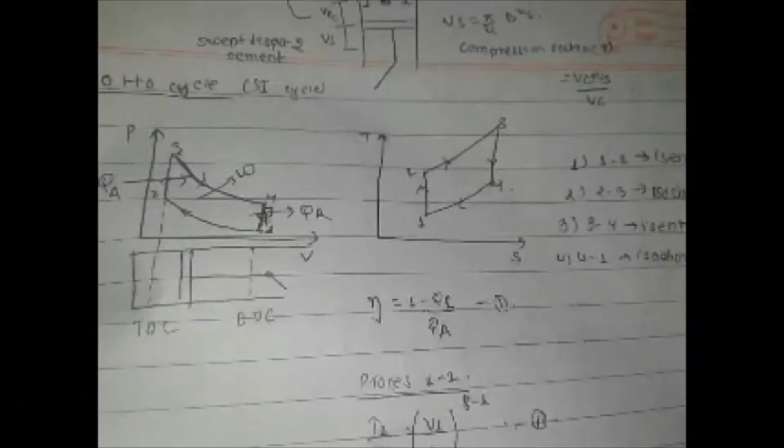And this time I have got Otto cycle for you, and good time to you all.

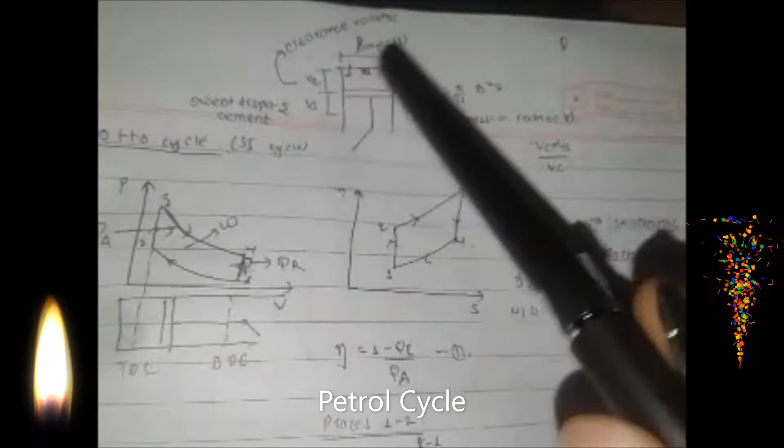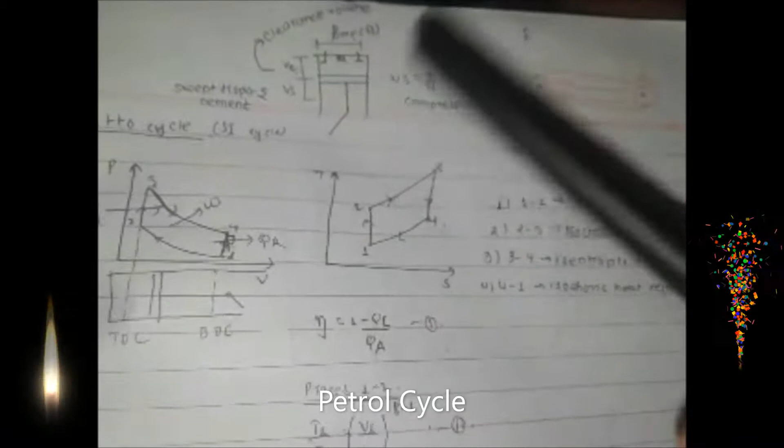Before starting Otto cycle, I will have some revision for you with this piston cylinder arrangement: what is clearance volume, what is swept volume. You have to know this swept displacement, what is compression ratio, and what is clearance, what are all these. And we know this is a piston, and this is a cylinder, and this is bore. Bore means the length, the cross section.

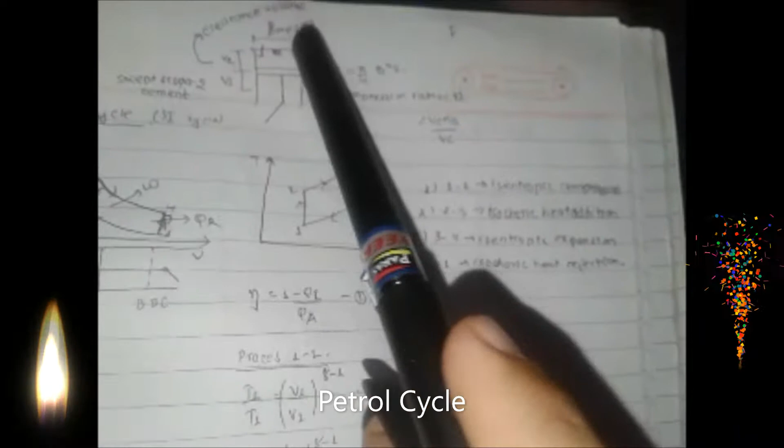Why is the bore length given, or what is bore? Bore is the radial distance of the cylinder. I don't mean it is the radial distance; it is double the radial distance, that is from one end to another end. Then why is bore length given? Bore length is given to find the cross section area of this piston.

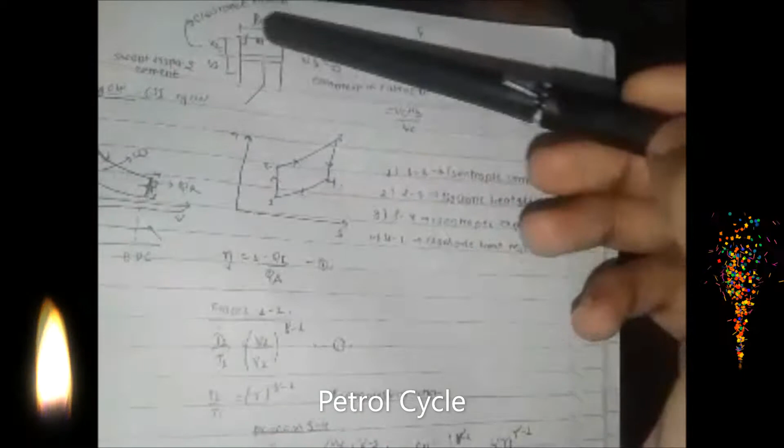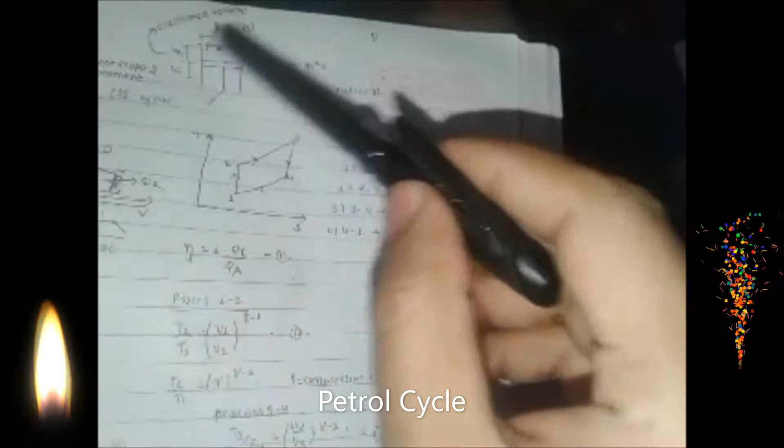And why is clearance volume given? Clearance volume is the volume which is not occupied by the piston. In the cylinder some space is left, and it is for a reason, so that the piston wouldn't hit and destroy the engine. So the clearance volume is set up, and this is clearance volume.

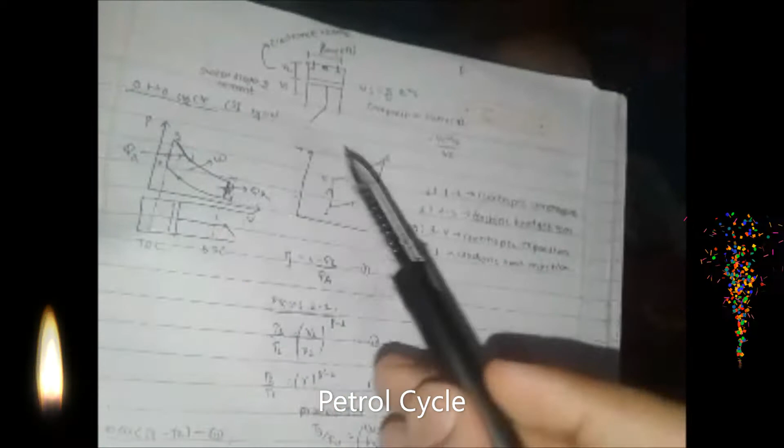Swept volume means the whole process which takes place in the swept region. From here to here is our clearance volume. Let me point it out. From here to here it is our clearance volume, and from here to here it is our swept volume. Our work done is only from the swept volume. I hope you are not confused about this.

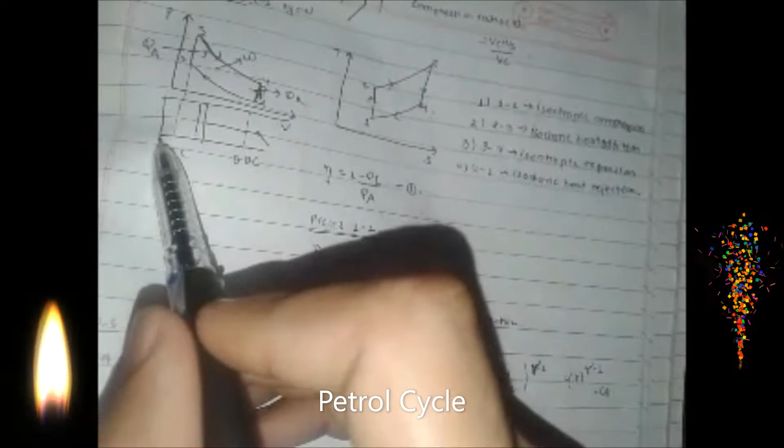And what is compression ratio? Compression ratio is the ratio of volume 1 to 2 or 4 to 3, the ratio of the volume at the end of the expansion stroke to the volume at the start of the expansion stroke. Since the volumes of state 1 and state 4 are equal, and 2 and 3 are equal, we can also say V1/V2 = V4/V3 = compression ratio.

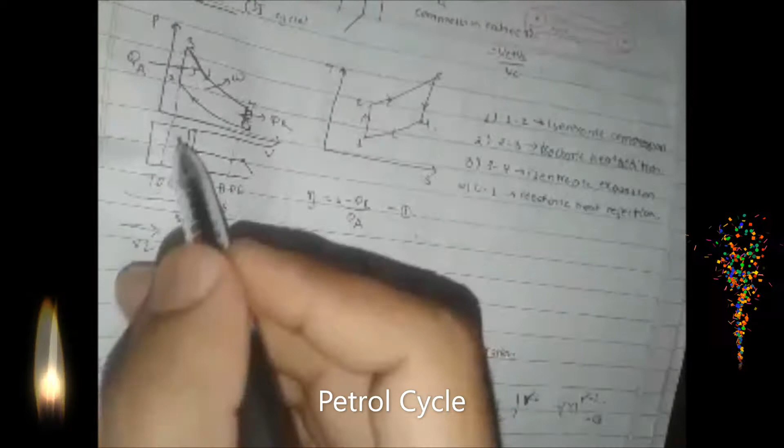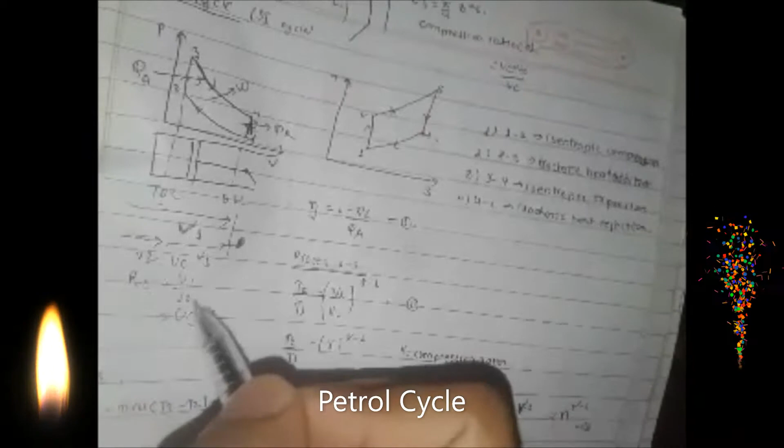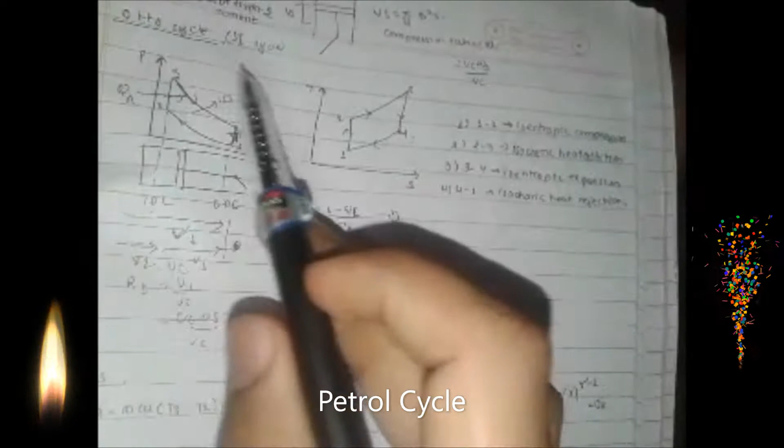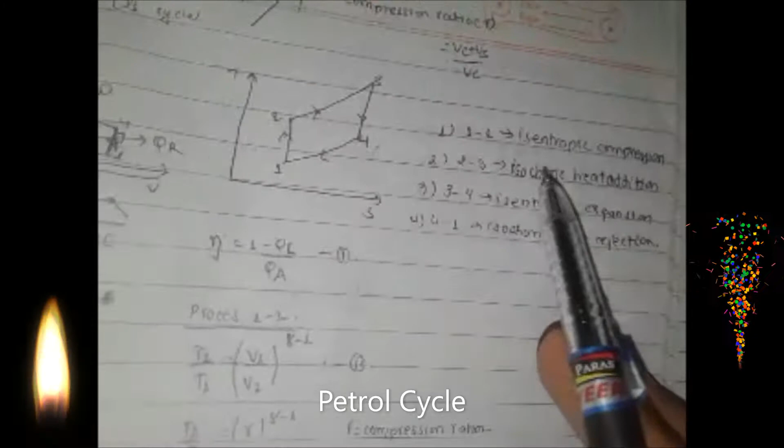From here to here we have got V1, and from here to here we have got V2. This V2 is also known as clearance volume, VC, and from here to here is our stroke volume, VS. So V1/V2 is our compression ratio rc. V1 is VC plus VS, and V2 is VC, so the compression ratio is (VC + VS)/VC.

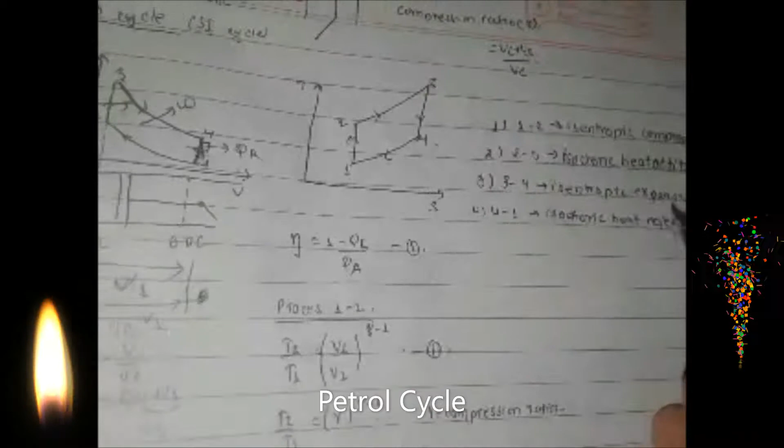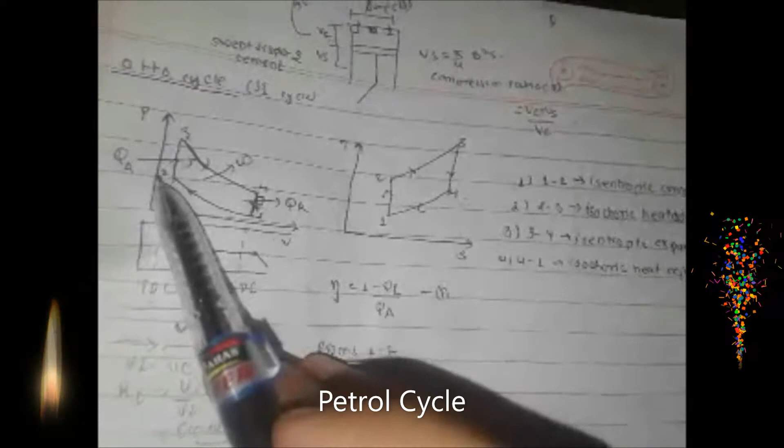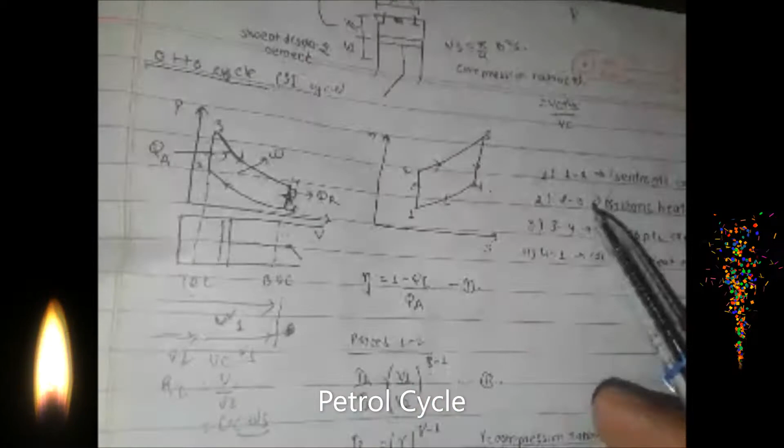The Otto cycle is also called the SI cycle, spark ignition cycle. The processes are 1 to 2 isentropic compression, 2 to 3 isochoric heat addition, isentropic expansion, and isochoric heat rejection. Isochoric means constant volume; isentropic means adiabatic as well as reversible.

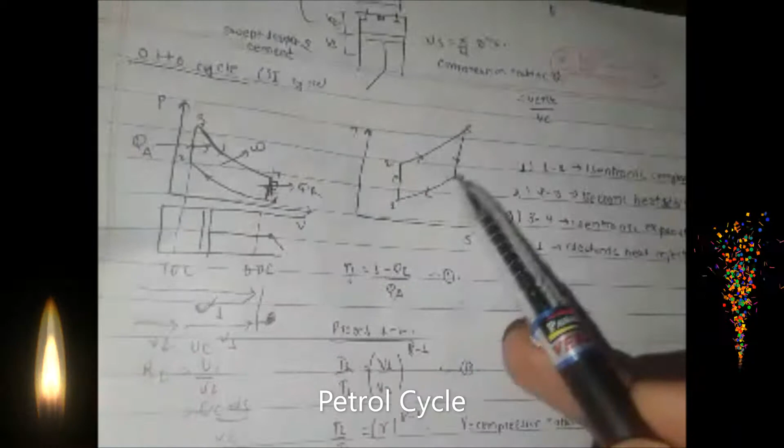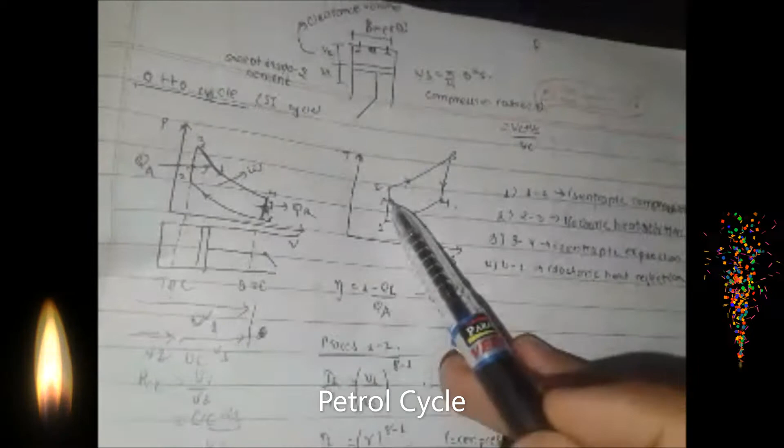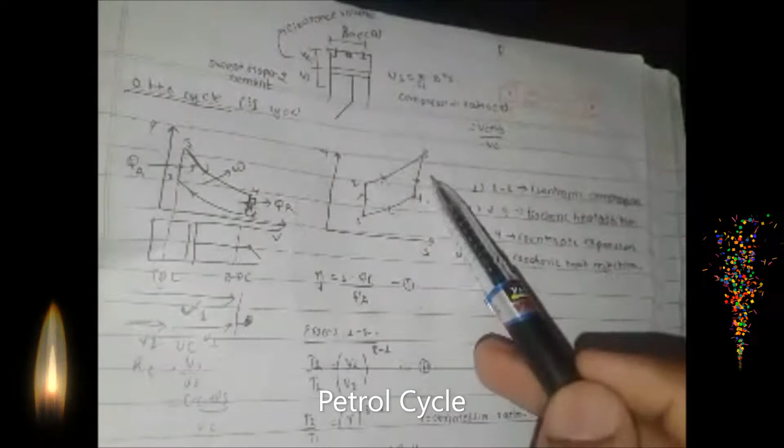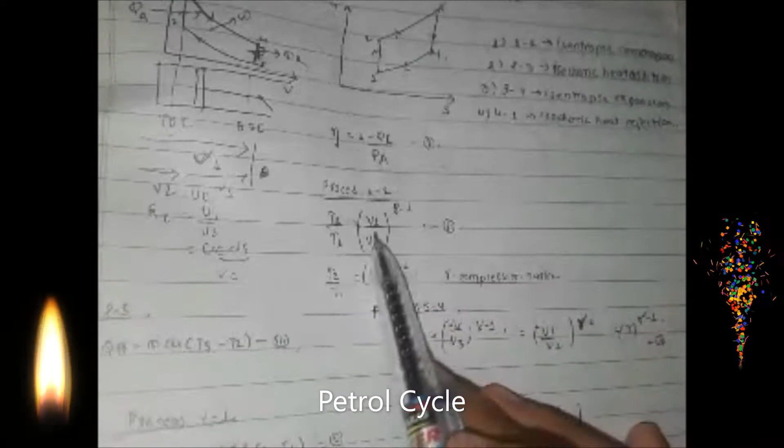Here work is done, here work is input, and heat is added in process 2 to 3. Process 2 to 3 is heat addition, 4 to 1 is heat rejection, QR. In the TS diagram, 1 to 2 and 3 to 4 are isentropic, that means adiabatic, so entropy is constant. Temperature rises from 1 to 2 and 2 to 3; 3 to 4 is isentropic expansion so temperature goes down, and 4 to 1 is heat rejection.

Now we have to find the efficiency, the same way as the Brayton cycle. For process 1 to 2, since it is isentropic, T2/T1 = (V1/V2)^(γ-1), where V1/V2 is our compression ratio r. Process 3 to 4 is isentropic expansion, so T3/T4 = (V4/V3)^(γ-1) = r^(γ-1).

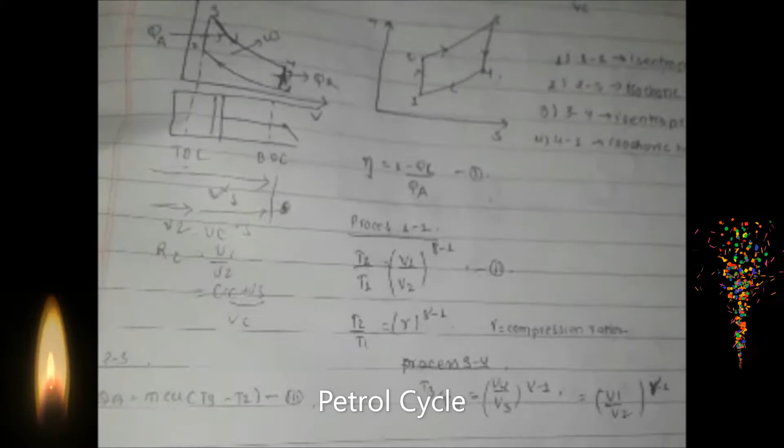From these we can write the efficiency as 1 minus T1/T2, taking it common, and finally efficiency is 1 minus 1 upon r to the power of gamma minus 1. Here also we have equal temperature ratios as in the Brayton cycle, T4/T1 = T3/T2. This is the thermal efficiency. You can analyze all of these on your own.